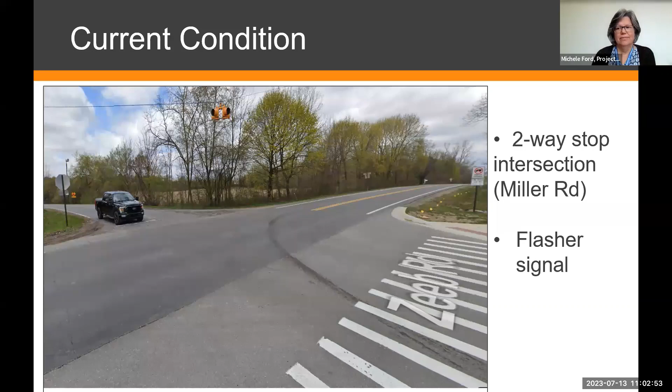So we've gotten the question of why are we improving this particular intersection. Well, it does have a history of crashes. MDOT did a local safety initiative study in 2018 of our entire county, and this was one of the intersections that was identified as having a history of crashes. As a result, we also applied for a federal safety grant, and that was awarded to us. So this is going to be a safety project to hopefully make things a little better out there.

When we were doing that, we went and analyzed the intersection to see if it warranted a traffic signal. We don't just put traffic signals up anywhere - there are certain requirements that have to be met. We call these warrants, and there are several of them, and you have to meet more than one. When we went through all of the analysis, we did see that a traffic signal was warranted at the intersection.

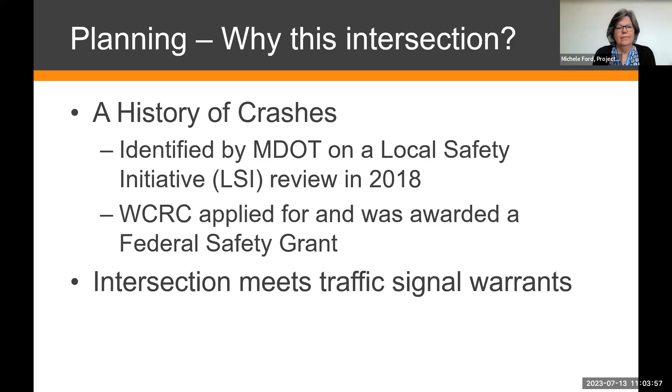So when we put in that safety application, we asked for a traffic signal. We were planning a box span, which means there would be the strings all the way around - you'd see the signals. We were going to put left turn lanes on all the approaches with a dedicated left turn signal. So why aren't we doing that?

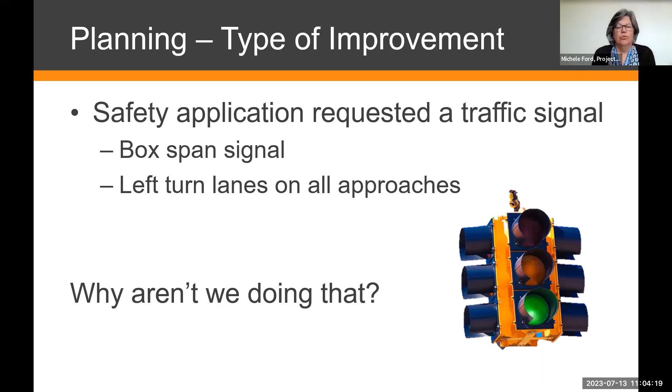Well, once we got into the design of it, there were some challenges with the road alignment. We would have had to lower the intersection - there's some vertical curves there, some sight distance issues. In the end, it was going to require design waivers, which we never like to do, but especially on a safety project, it didn't make sense to us. It was going to cause quite substantial impacts to the neighboring properties. So we decided to change to a roundabout.

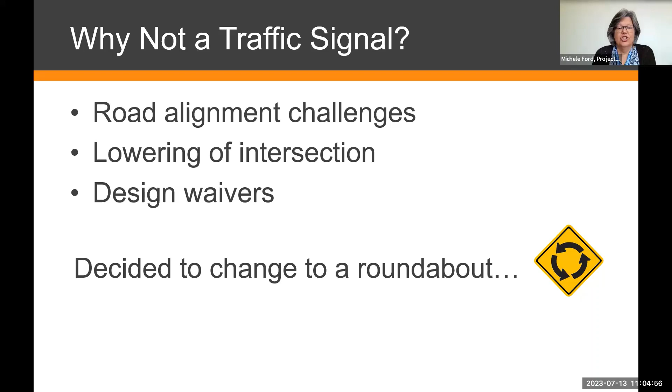So why a roundabout? We contacted MDOT, and they were agreeable to it because for safety, roundabouts are one of the tools we use. Statistically, as you look back on the history of them, there's about a 90% reduction in serious injury or fatal crashes. It does reduce, in general, the total crashes, but once again, the important thing is if there are crashes, they tend to be less serious. It helps to lower speeds in the area. We can get improved traffic capacity with it, and it does offer the opportunity for aesthetic enhancements.

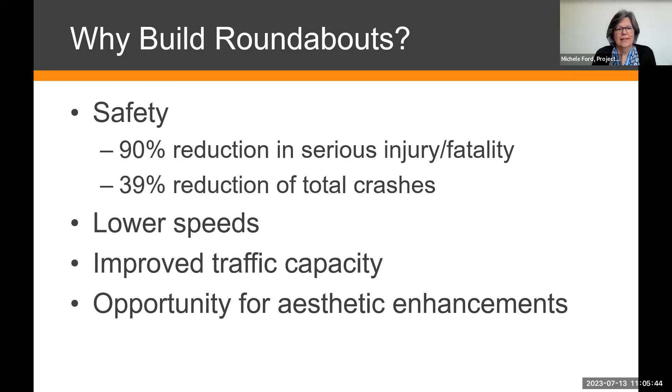One of the things we look at when we're looking at safety is points of conflict. What we mean by that is the areas where cars have an opportunity to connect with each other. They can do that when they're merging, when they're diverging, or when crossing an intersection.

A standard cross intersection has about 32 points of contact, points of conflict. But on a modern roundabout, that decreases to only 8 conflicting points, and as you can see, there are no crossing conflicts. The crossing conflicts are where you tend to have the more serious accidents that could possibly involve injury or fatality.

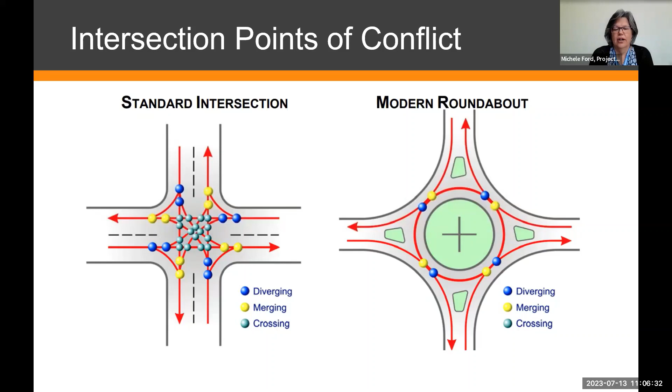This is a picture of one of the roundabouts we've put in the area in the last few years. It's just to show and remind people who are driving that entering traffic yields. It goes in a counterclockwise movement, and then we use islands to control speed. We call those splitter islands, the ones on the approach there. We also have a central island.

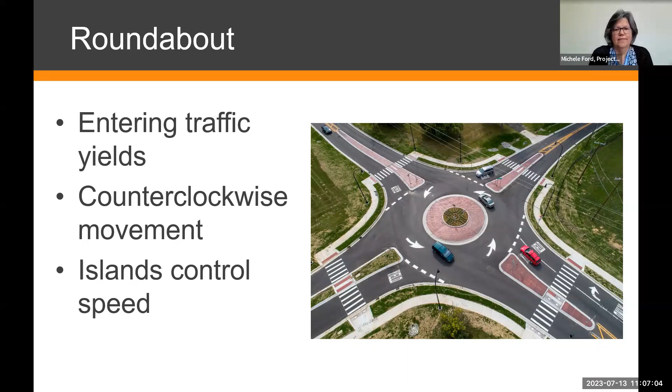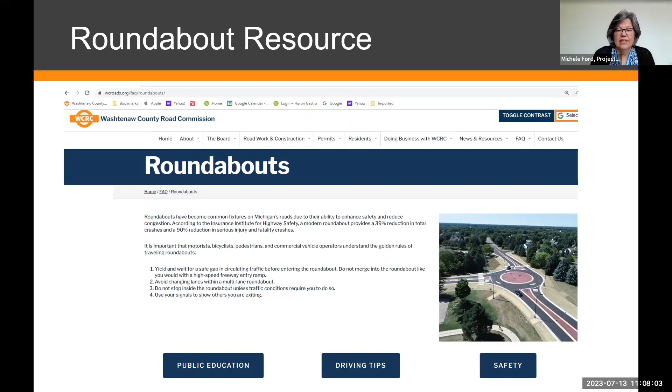If you want more general information on roundabouts, we do have a resource page on our website. So you can go ahead and look at that. There's some public education material, driving tips, and some information on the safety studies and stuff that have been done.

Back to our project - the funding for this, our largest source of funding is the safety grant that we applied for and were given. We also have some of our federal surface transportation program funds, those are our yearly federal funds that we receive. And we're also using some of our local Michigan transportation funds, which are generated through license and registration fees as well as the fuel tax. The construction cost estimate for this particular project is $1.2 million, and that's pretty much in line with how much these smaller one-lane roundabouts cost for us.

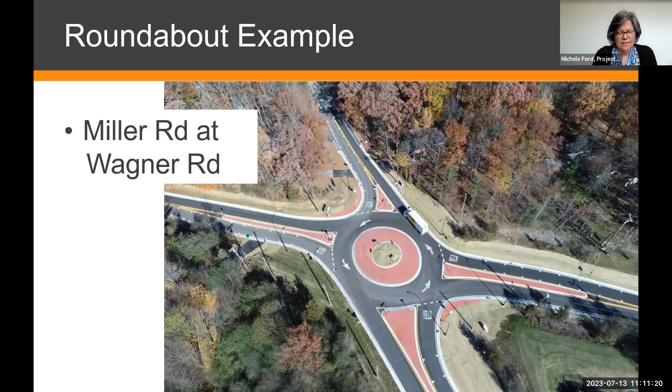Then Liberty at Zeeb, we put in last year. That also is a single lane roundabout. This particular one we used concrete. The one at Miller and Zeeb will be asphalt, similar to the one at Miller and Wagner. But this is just another example of one of our roundabouts.

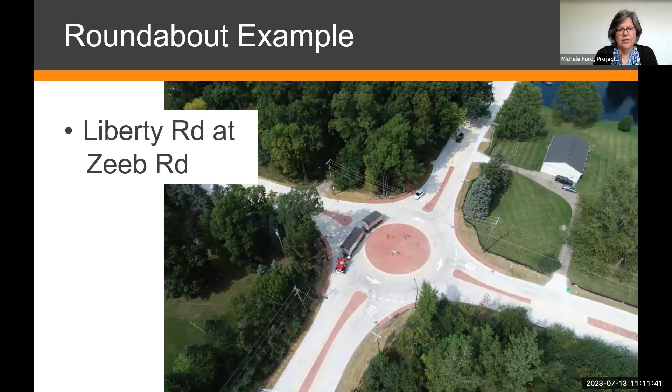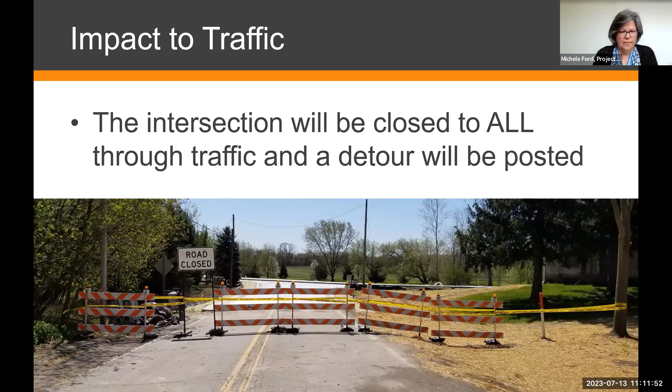During construction, the intersection will be closed to all through traffic and we'll post a detour. We'll maintain access for area residents at all times, and that pathway will be maintained, but with temporary materials. Michigan Department of Transportation has provisions and requirements for that temporary pathway, and the contractor will follow those to make sure any bicyclists or pedestrians can get around the construction safely.

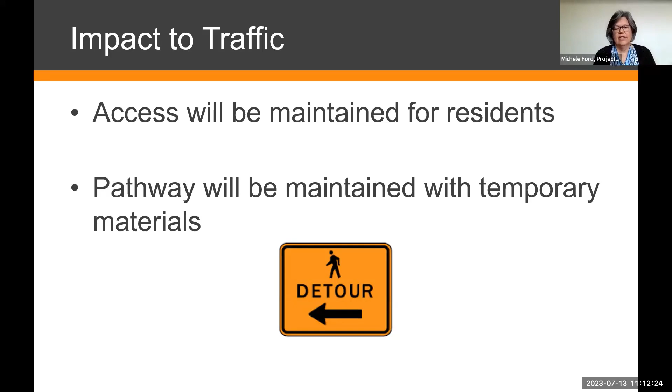So our next steps are finishing up the design. We're pretty much finished with the design, just finalizing our bid documents and finishing up our right-of-way acquisition, where then we will submit it to MDOT for a bid letting. That's when they'll open up the bids. Right now we don't have an exact date for that. It depends on when we get those bid documents turned in, but we anticipate probably early next year that will be in a bid letting.

Then the contractor will be awarded. We'll have a construction information meeting once we get that contractor and have a better idea of the schedule. Right now, construction will be in summer of 2024. I don't have exact dates - that'll be once we have the contractor and get their schedule. In general, we probably will wait until after school is out for the summer and then start at that time.

So if you want to find out more, Emma, you want to tell them how they can do that?

Yeah, so let me take a minute to navigate to our website to show you guys how to get information about the project and sign yourself up for subscriptions.

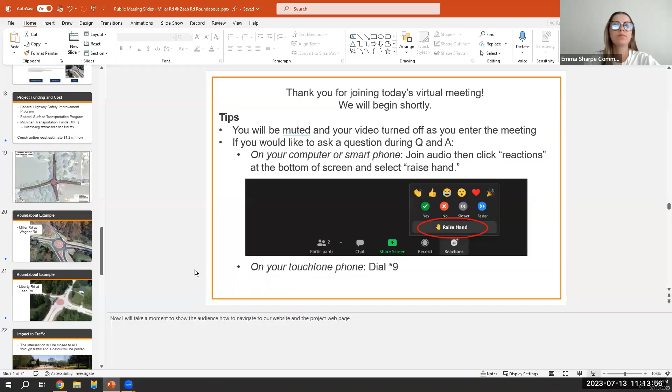Okay, so right now I've got Google open and I have our web address, wcroads.org, up in the search bar. Going to enter it. And this is what our website looks like at first glance. Then you're going to want to hover your mouse over the roadwork and construction tab, and you're going to have a drop-down menu. You're going to want to click on current projects. Here you'll be able to see a map of all the construction work that we have going on in our county, and the information relating to each project.

It's organized alphabetically, so here's Miller and Zeeb. You can click on that. You'll be able to see a map of where this project is taking place, what township it's in, the funding information, and the impact on traffic. You also have Michele's contact information here, so her email and phone number are both provided, and in these helpful links will be information regarding the detour and other things like that.

So as you can see, we've got the virtual public meeting that was posted here on the website, so any advisories or project updates will be posted to this webpage. You can also click on this orange button that says subscribe to project updates. This will bring you to a form where you're able to fill out your personal information and sign up for different types of notifications, including project updates for this project specifically, road advisories, and anything else you might be interested in.

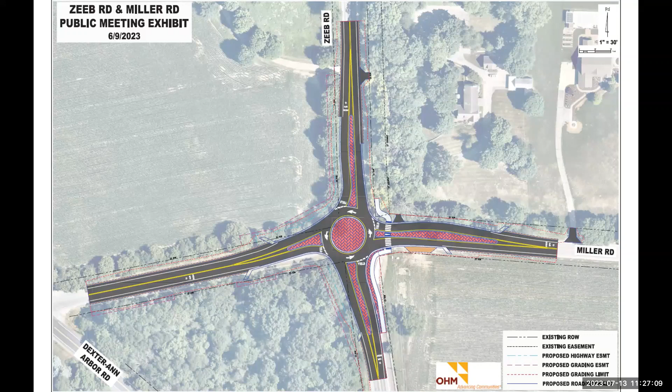I was curious about the layout of the project. It's shifted north, it looks like, as Janet was mentioning, onto some personal properties. I'm curious about that triangular property that no one lives on, to the south, between Dexter Ann Arbor, Zeeb, and Miller. Why isn't the roundabout shifted more in that direction, maybe helping the surrounding property owners maintain more of their land? I'm curious about that.

Sure. We looked at it—it's mainly shifted to the west, as Michele indicated. We look at the geometry of the intersection. It's definitely intentional when we're looking at the approaches—as you approach the intersection, the geometry of the roadways is designed to have drivers slow down, so we've got curves and the angle of the intersection. This is a skewed intersection, not the normal 90-degree T or cross intersection. Miller Road through the Zeeb Road intersection is definitely skewed, and Zeeb Road is also on a curve. So this was tricky geometry, but we worked to optimize and balance the impacts to property owners while having the safest geometry for this roundabout. And this is what we came up with.